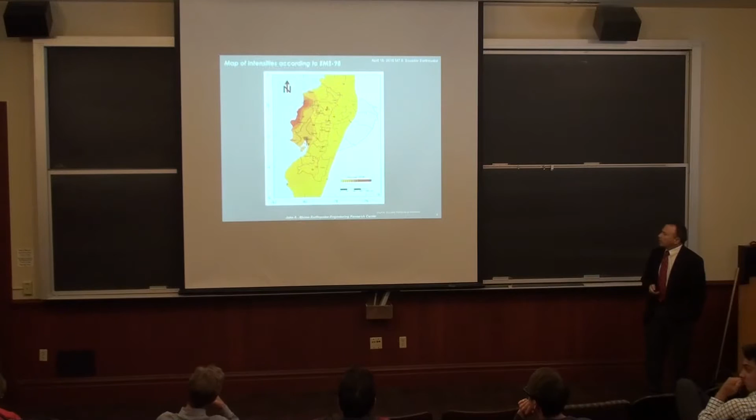And this is the shake map from USGS, and that's the approximate rupture area. So a very large rupture area, about 150 kilometers long. So keep that in mind, because we tend to refer to epicentral distance, and you may be 150 kilometers from the epicenter and still be on top of the rupture. So you may see pretty strong motion still very far from the epicenter. So other kinds of measures of that.

And you may have seen this from the news, the overall effects of the earthquake. The way fatalities were counted there was when a body was pulled out and identified, so I'm sure the real number is much higher than this. And these were injured that checked into a hospital, and the number of displaced residents are those that were sheltered in a public shelter after the earthquake. And in Latin America, it's not like the U.S., so if I were to lose my house, I would not go to the shelter. I would probably go to relatives or friends, so the last resort would be a public shelter. So my estimate would be about 3 times that number of people that lost their house or didn't have a place to go.

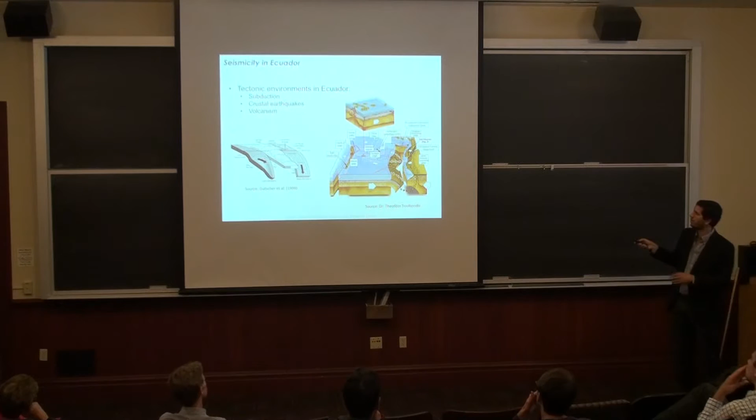So the earthquake that happened now was in the north subduction zone, and the theory is that whenever an earthquake happens in this zone and it propagates upward, it stops right here where the Carnegie Ridge is. So that's pretty much what we have. And also this subduction process has started a transform plate boundary within the continent, but that's not the subduction earthquake that we are there.

So the other big earthquakes before this one were the big 1906 earthquake that ruptured approximately 500 kilometers along the coast, and then 3 earthquakes in '42, '58, and '79 that together, at least that's what they say in the literature, ruptured the same length as the '06. And then came a small 1998 Bahia, which had a lot of damage in Bahia, and now this earthquake, which was here.

So I just told you that the '42, '58, and '79 covered the 1906. That's what was believed before 2014. But then this author says a potential for a magnitude 7.5 event in the next decades needs to be considered there, as well as a potential tsunami. And this is what happened in the earthquake.

So the hazard analysis that we run in Ecuador is based mainly on the subduction zone, and also crustal faults in the continental crust. And the PGA, for example, for the 475-year return period, is 0.71g in Manta, which is a city close by that suffered a lot of damage in the earthquake.

Now, somebody's going to talk about the code, and the code only says 0.5g for the 475-year return period. And the reason why is because they cap it at a maximum of 0.5. So whenever they get something greater than 0.5 for the 10% in 50 years motion, they will just cap it there for economic reasons. And the other thing is this sort of hazard analysis gives you this mean curve, and there's a lot of variability around it.

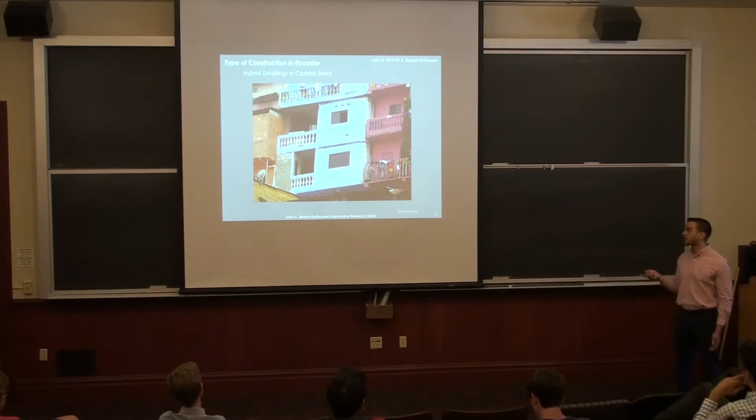This is the type of dwellings that you find on the coast. Some are made out of wood, others are made out of concrete. And these are patrimonial buildings, which are basically where the first settlement took place in every city. These buildings are trying to be preserved, and they are about 100 years old.

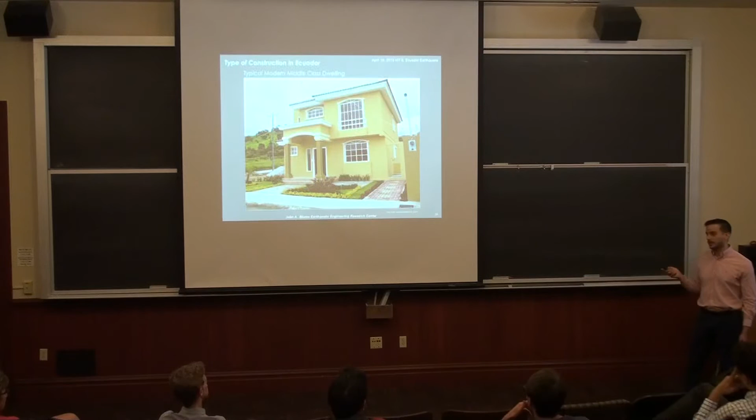This is the type of dwelling, modern houses of middle-class families. They are concrete moment frames designed by a structural engineer. And these are concrete moment frames, but on a bigger scale. For this, we use the ACI code. And we also have steel moment frames, but not as many as concrete moment frames.

So I'm going to talk now a little bit about the recorded ground motions at the 30 stations whose records we were provided. This is courtesy of the Geophysical Institute of Ecuador. They do a great job of collecting. It was a pain to get them to give it to us because they were so busy and they had to go to some of the stations, and we finally have them. They have been processed through the PEER standard procedure, and I think they will probably be shared with PEER and put on the website.

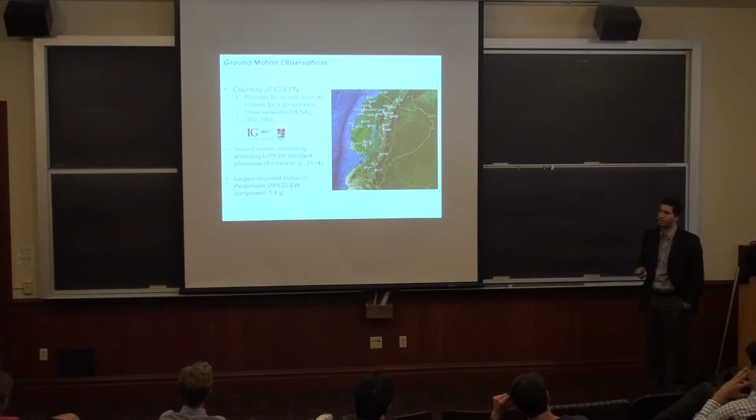The largest recorded motion was in Pedernales, in one of the stations in Pedernales, 1.4 G in the east-west direction. You will see a record. So the first thing I did is I plotted the stations in Google Maps and I classified them as greater than 0.3, below 0.3 and 0.1, 0.1 to 0.05, and below 0.05. And the intensity maps from USGS. And you can start seeing some things.

For example, you see a lot of red to the south of the rupture, and you don't see that at the north. I don't know what's the reason for that, but it's something that is worth looking at. The other thing is Guayaquil City is known for its soft deposits, so site effects are important. And you can see from both the intensity maps as well as the recorded motions that the PGA or the intensity is greater for Guayaquil City in green, that is on a soft site, than the blue that is on a rock site.

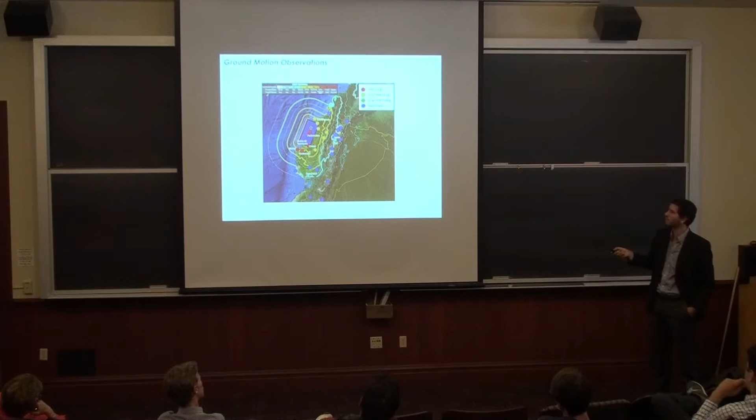Now you can see 8 motions that I selected for plotting this. So the first one is Pedernales, the 1.4 G. Actually, it's this spike here. You can mix it with the Chone one, but it's over here. And then Pedernales, the other station, 1.06. Then I selected this AB21 station because it was a similar distance to Chone. The only difference is it's located at the north, and it was 0.2 versus 0.37, almost double. So we don't know why that's happening.

The other thing is Manta is 0.5, even though it's further away. And when we went to the station, it was on a cliff, so we may think that it's topographic effects there. And Portoviejo is 0.38. The important thing about these three is that you can see the frequency content. It's much higher frequency here in Manta, Portoviejo and Chone. So we thought maybe it's site effects, some type of soil effect that's going on there. And then the other one was Guayaquil as well. Here is a rock station, 1,000 meters per second shear wave velocity, and this is the record. And this is 5 times the PGA of this one here. It's 0.1 G, and it's in soft soil.

The other thing here is Pedernales, the time history. You can see it's a relatively short motion for a subduction earthquake because the distance is small. In Guayaquil you have like 1 minute of shaking or more than 1 minute. Here the strong shaking is 40 seconds. And then you can see the spectral values are much higher than the design value.

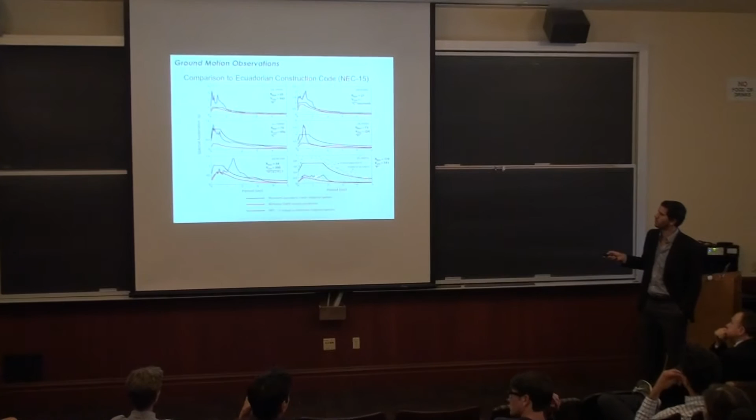Now I'm going to talk about the geotechnical aspects of the presentation. First, liquefaction that we saw in Manta. This is a sample of 90 centimeters. Nothing happened to a bridge, the bridge was on piles. Then I measured what the ground settled relative to the bridge, because that's the settlement of the ground, and that's of interest, for example, for buildings. It was like 20 centimeters of settlement.

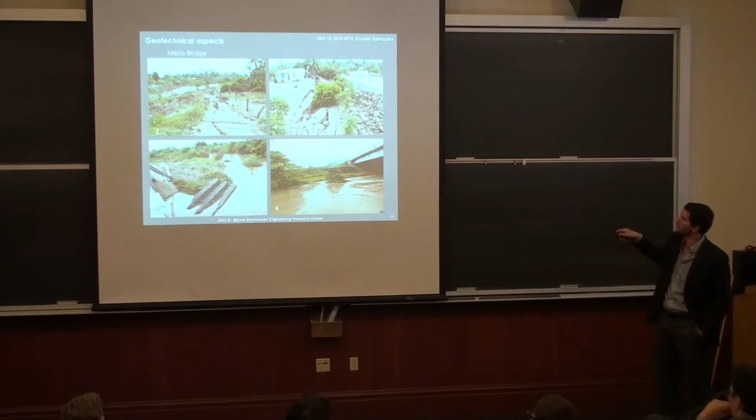Then this is the Mejia bridge. I'm going to show you 4 pictures of the abutments. The bridge is fine, and I'm sure some of you are going to talk about it, but the abutments did fail. This is my foot for scale, it measures like 1.8 meters, so it's a lot of displacement. This river displaced 2 meters laterally, so it basically changed the channel of flow. This was the other abutment, the guardrail failed, and the other abutment didn't, nothing happened. So it was these 3 abutments that failed from lateral spread and liquefaction.

Then this is an interesting case in the sector of Tarqui. Manta had a lot of damage. This is before the earthquake, you can see it better here, it's probably 3-4 centimeters above this house. And this is what happened in the earthquake. So what's going on here, and we saw a lot of this also in New Zealand, the foundation was, this house was 2 stories and then they added 1. The foundation was probably 2 spread footings with tie beams, but the beams there are not reinforced, it's flat construction. But then it was a bearing capacity failure.

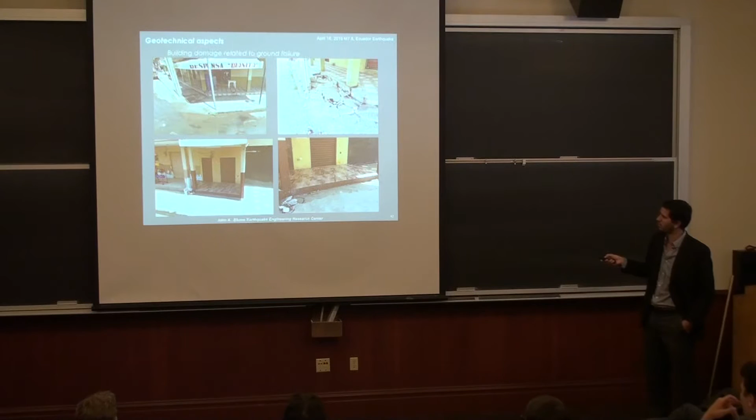The house didn't have much damage in the elements, but look at this, the soil within the house. Then this is the same thing, this is before the earthquake, and you can see how the sidewalks go up, like a bearing capacity type of failure, and the building punches into the ground. And here it's more clear. This is a sidewalk sloping this way, and now look at this after the earthquake. So the whole house punched into the ground.

Now this is a slope stability case. I'm on the bridge right now, and I'm just looking at the slope before the earthquake here in Google Maps. This slope goes the same way under the bridge, and there are 4 piles that we will see next that are within that slope. So this is the slope failure. Here they sold cars, so some cars almost went down, and then this is the failure of the slope itself. Here you can see this white is where all this was covered with soil, and the soil moved laterally towards the river.

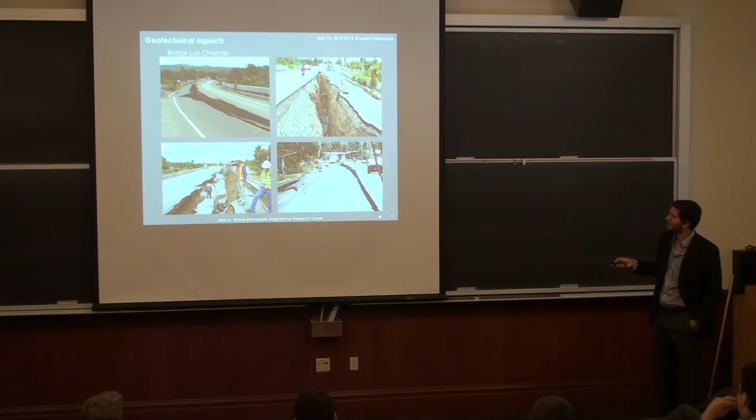This is an interesting case, the abutment of the bridge Las Chacras. It's not well transited, it's a small town near there. This is me, and this is probably 0.5 meter, my leg, and this is probably 5 meters of the crack being there. This line here goes with this line, and these were all together, this all laterally spread that way, and punched into the ground too, because this was like 2 meters of sediment. And this crack ran along the embankment, like 800 meters on one side, and like 900 meters on the other.

We took some shear wave measurements to see what material is there, and we know there are some clay deposits about 7 meters deep, and the embankment was 4 or 5 meters deep.

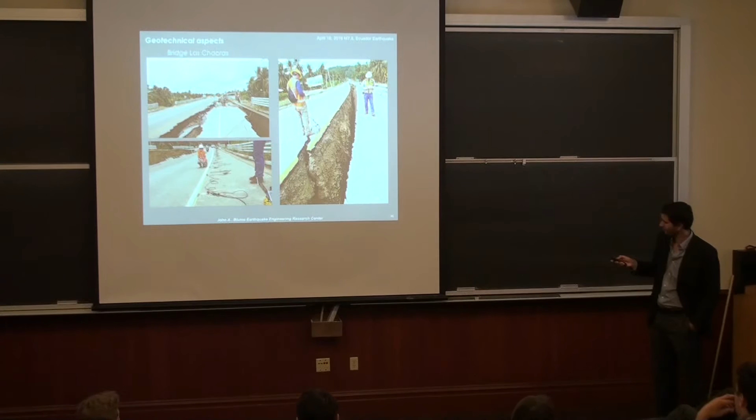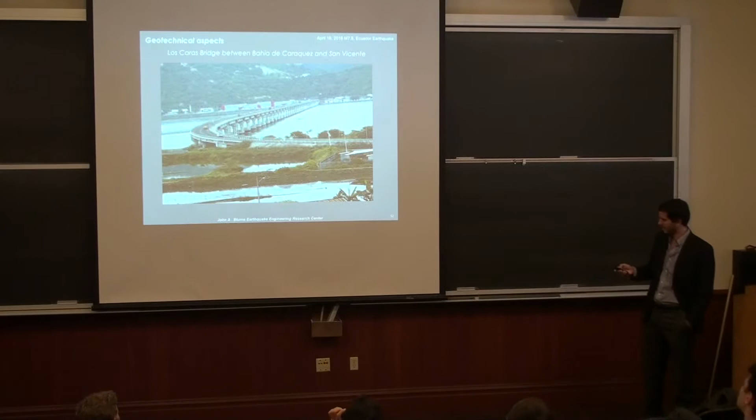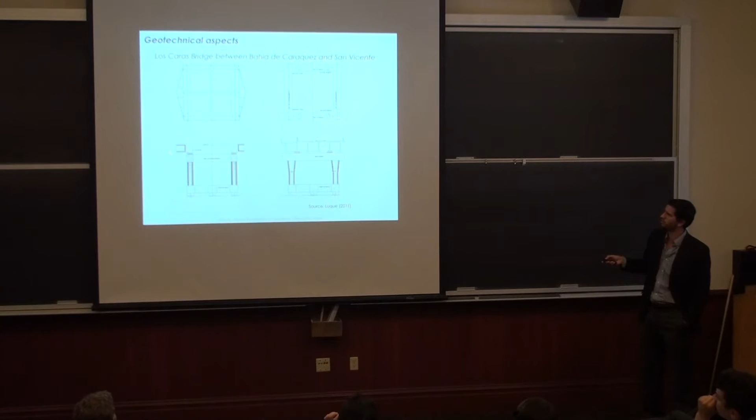Los Caras Bridge is important because it was a success in that it was designed to be operational after a big earthquake, and it was. But I was surprised because I was involved in the project. I did my undergrad thesis on this bridge, and I also was involved as a consultant for the pile contractors. I expected a lot of liquefaction. They're going to talk about the structure, but it's mainly 9 or 8 piles, and then this kind of weird substructure with 4 columns, and they have seismic isolators here. They're going to talk about that.

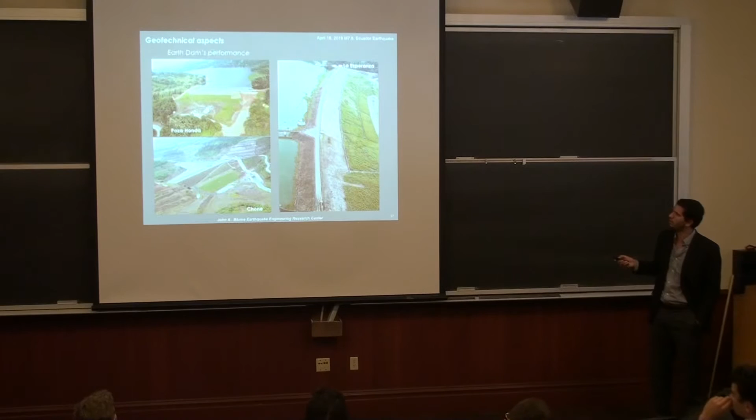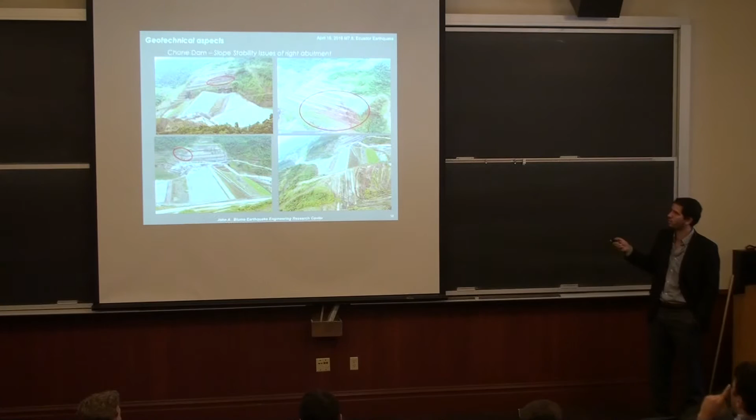Then there's the dams. I went to visit 3 dams by helicopter, and two of these had nothing. This one here had a little bit of slope failure in the right abutment. Here you can see this one is the same, and this one here is also the same, but it's minor compared to the shaking. Fortunately it wasn't worse here, because I've heard that there was some liquefaction there, some material that liquefied.

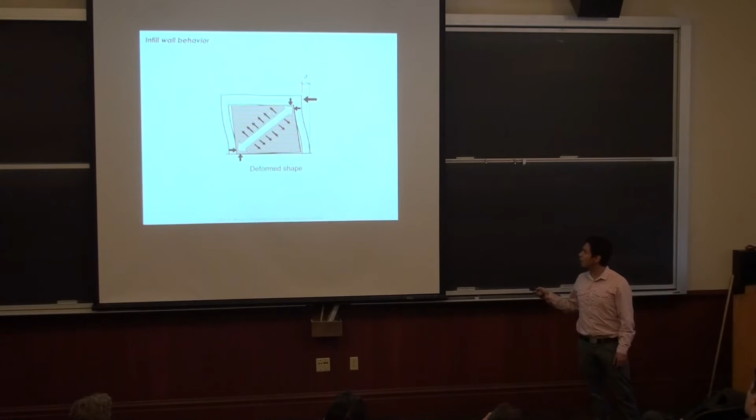That's going to lead to this crack over here. But since earthquakes are cyclic, the same thing is going to happen to the other side. And if that is combined with certain movement of the infill in the other direction, we can lose part of the infill. That's going to be an out-of-plane failure.

And this is what happened in reality. So our cartoon became real. And this happened over and over, even though this doesn't have the beam over here. It had this U kind of failure in the infill.

This case was a small hotel. Actually, a kid was rescued from here. He didn't want to go to the beach with his parents, but happily he was alive afterwards.

And the thing is that if we observe the details of this building, you can see this laundry machine over here that is carrying some extra load. Maybe we think that might have saved the life of the child, and actually these kind of things can save your life.

Another interesting example was this school, the Atahualpa school in Pedernales. It suffered some damage. We see here a back view of the school. If we look closely, well the picture isn't that great, but we have some short column behavior over here. Let's look closely to it.

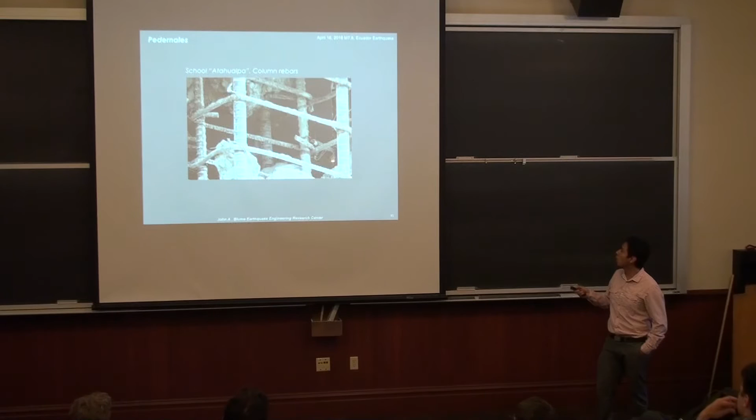This is even good detailing. Rebar number 3, each 4 inches, but it still had this short column behavior. The hooks here are 135 hooks, that's fairly okay. So this is another view of the same school.

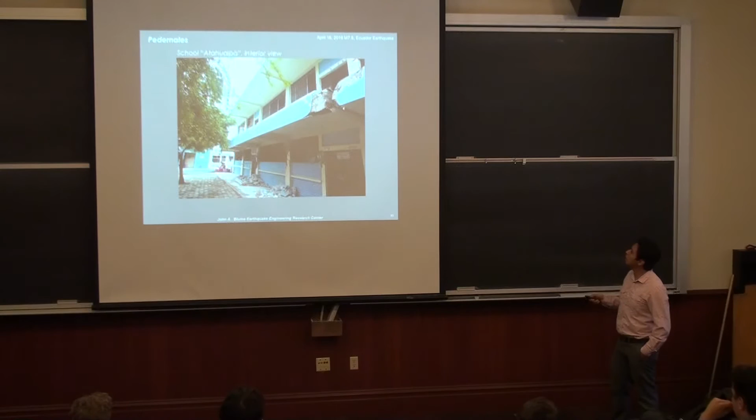If we look at the joints, we see that due to the high shear in this part, there was some concrete spalling over here. And similarly, this is a view from the interior of the school. We can see here the shear failure of this column due to the short column behavior. This is good detailing, nevertheless.

And this image is also important because we see a lot of out-of-plane failure, and though this earthquake happened on a Saturday, if it were to happen during classes, this is very dangerous for kids studying here. So we see the table with a lot of debris here.

And also we see this picture over here, that if we put certain circles over here, we can remember some slides of Professor Miranda, this collapse mechanism. Looking closely, we see a bunch of plastic hinges in the top and bottom of the column. Looking at it, we can see the tension and compression parts. The same thing in some other details of this plastic hinge over here.

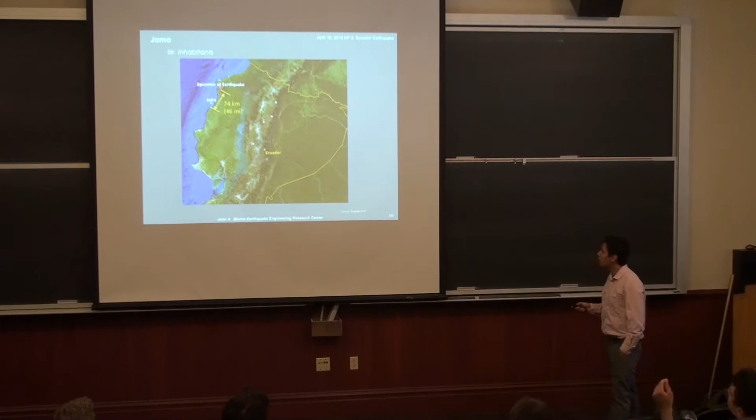And well, that was Pedernales, one of the most damaged cities. And I'm going to cover now Jama, which is a place 46 miles away from the epicenter, 6K inhabitants here. This is a view of one of the schools.

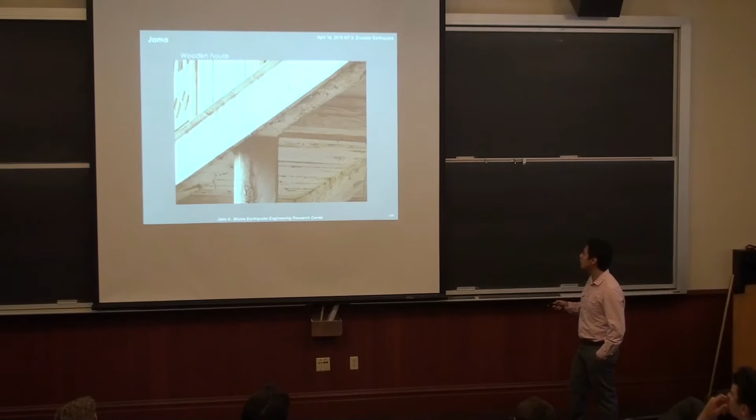And surprisingly, next to this school there was this precarious house over here. It actually has certain damage in the back, but other than that, it's fairly intact here. So it's pretty surprising to see, given the large PGAs, that it made it through the earthquake. We can see some of the connections, and we can see that there is no nailing, so this was actually very surprising. And even though this is a light building, it took a lot of acceleration in the bottom.

Same thing, no nailing. Some details of the slab over here, and in the back, the partial collapse of this slab over here. And we saw some interesting details over here of how is the connection. So you can see certain things sticking out of the column, and that's connecting to the beam over here. So we thought that this was maybe the classical way to do it also in Pedernales, and maybe this is responsible for saving a lot of buildings like this.

Now we see this is a very old building, maybe 80 years old or 50 years old building, and it's fairly okay, but it's astonishing to find that the neighbor over here has totally collapsed. It's very impressive what differences you can find in just a few meters away. And with this,

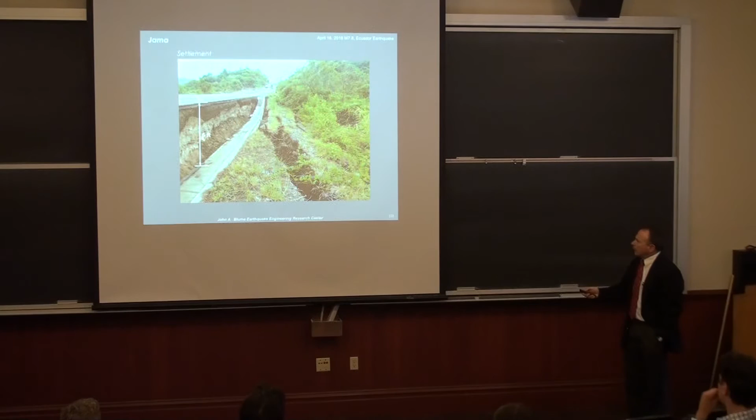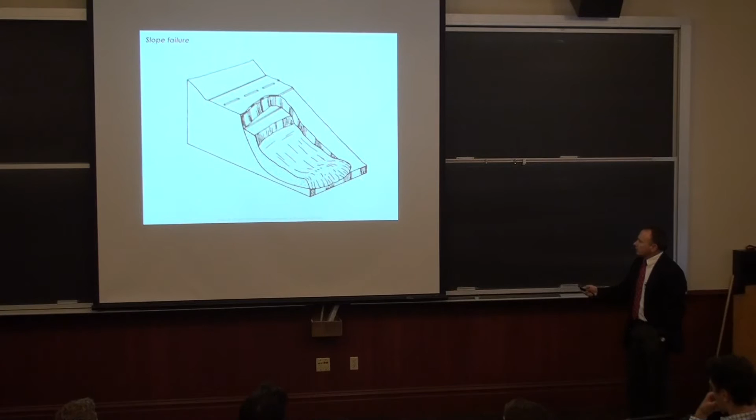So basically, you see this was essentially the drainage that used to be up there, and down there. And really what is happening is this elliptical surface. Those of you who took foundations, you may recall this. That's that displacement that you see here, but there's really a large body of earth that is failing along that elliptical surface. And this is a cross-section that is prepared just to illustrate a little bit how this large displacement is happening.

Usually there's some sort of toe. In this case, it was mainly sort of in the jungle to the right. We took some photos where there's some plants where you can see this. And this was a massive landslide. I mean, sometimes you see landslides after earthquakes. This is as big as it gets. Like half the mountain came down.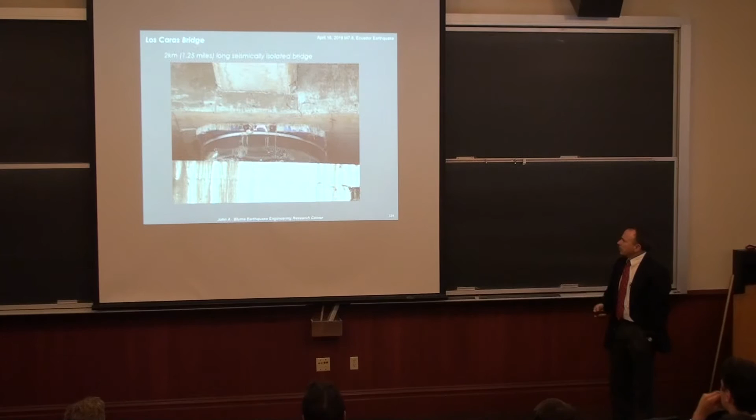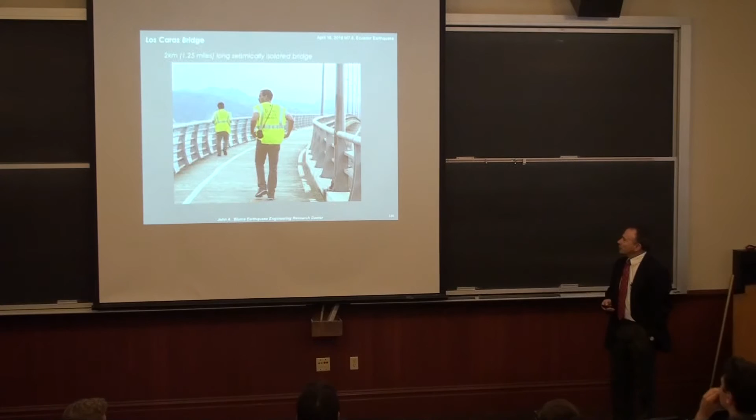I'll show you a detail on the north end where we were able to measure. It's unfortunately not instrumented.

And just interesting: my city is thinking about passing Castro Street, I live in Mountain View, underneath the Caltrain tracks along with Central. So one underpass, they're thinking about spending $120 million. This bridge cost $100 million. So just to give you an idea of what good engineers in Ecuador can do. This bridge here in the U.S. would cost 5 or 6 times as much at least.

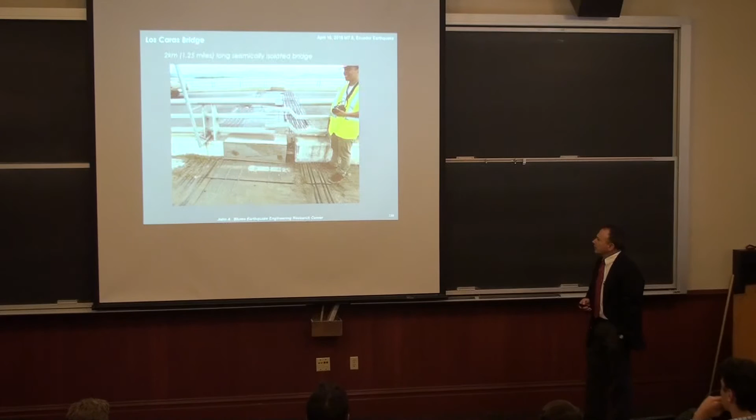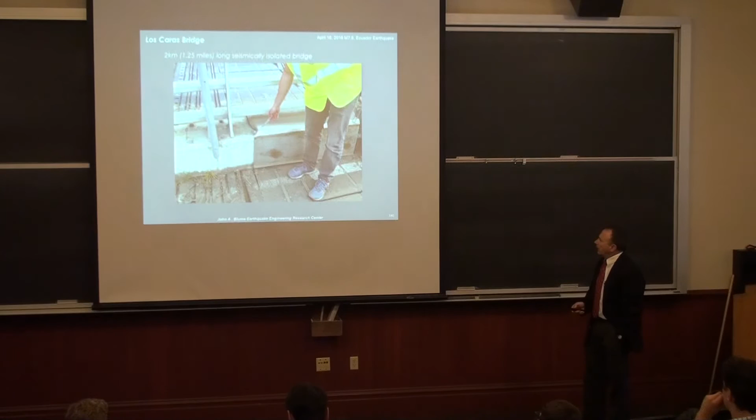And so this is the cover for the joint there. And that's just a close-up view of how that cover was displaced, 20 centimeters. And then it was displaced and buckled there, so we just documented some of that. And that's sort of a record. And the other thing, we put our cameras inside of that and we were able to document the scratching of the cover against these guys.

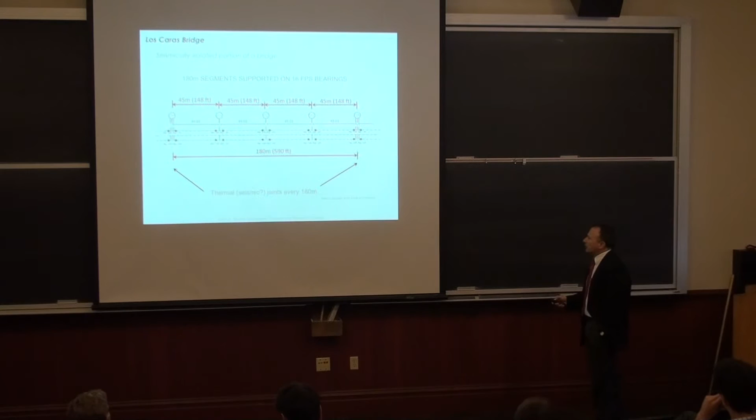And so the bridge is 2 kilometers long, but has this every 4 segments. These are continuous, and then there's some rather small joints there that I have no idea what was the thinking. I think they were primarily aimed at thermal. They're rather small for seismic joints, 4 inches, as I'll show you. And so I'll show you some details of those examples of sort of thermal seismic joints.

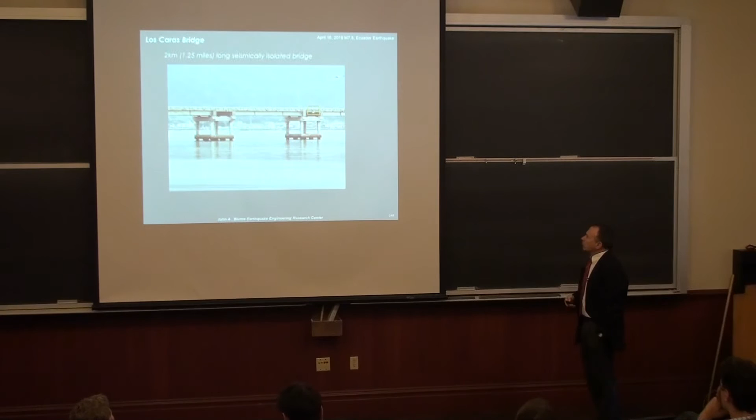But this is sort of the lesson. Sometimes we as engineers put together mathematical models and we have some sort of idea how the structure will behave. Imagine the engineer thinking of a uniform input on each one of these supports, but in reality you can have different motions and they're not necessarily going to move the same. Schematically they may look the same, but they may end up moving differently. And that's what happened. We documented a lot of pounding on these locations.

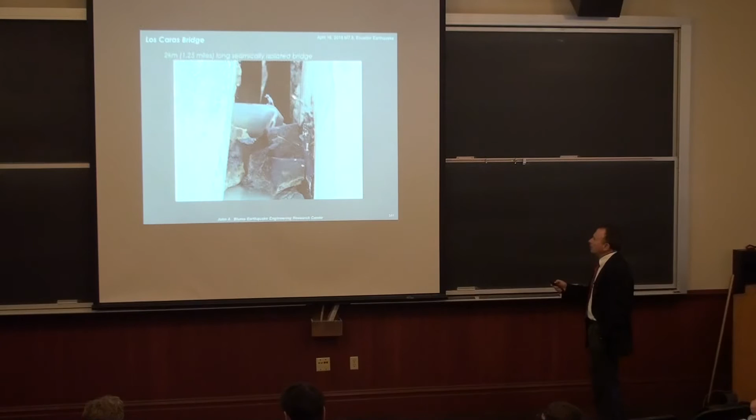And the other thing was kind of interesting, with a lot of thought that goes into doing a seismically isolated bridge and a lot of cost buying these things. Well, the message didn't go to the electricians. So the illumination, which is very nice in the evening on the bridge, they had this PVC piping through the seismic joints. Of course, the earthquake took care of that. But that allows us to also measure some of the relative displacement that took place there. So in this case, it failed in tension, and then there was some pounding there, so we pulled out our crack meters and we were able to measure 4.5 centimeters of relative displacement there.

The other thing we observed there, some of the seals of the isolators failed. And these are pretty much how they're done everywhere in the world, but now we know how they work. So there's a small lesson there, probably the company that manufactures those needs to think about a better way of doing that. If you think about it, there's a lot of these structures that have this kind of hardware, but very few that have gone through a big earthquake. So it's very important to understand and document what happens. We documented a small residual displacement, as you see there. This is just looking down the bridge.

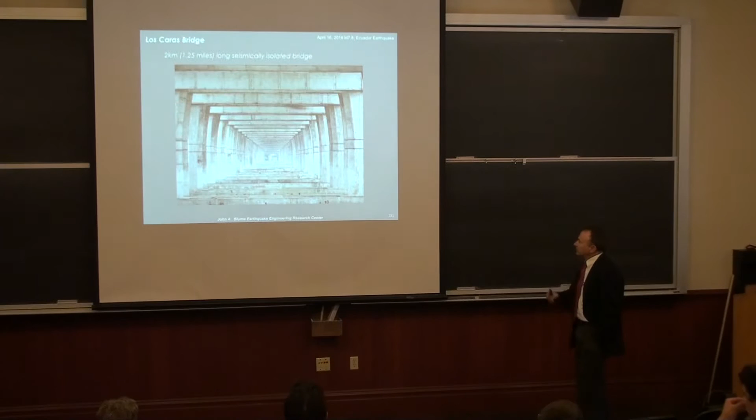And the other thing that I didn't quite understand: I always tell the students in class, you have a system in series, it's as strong as your weakest link. So why would I do a portion of the bridge that is fixed base if 90% of the span is isolated? But that's what happened. The south end is fixed base, and I would have isolated the whole thing.

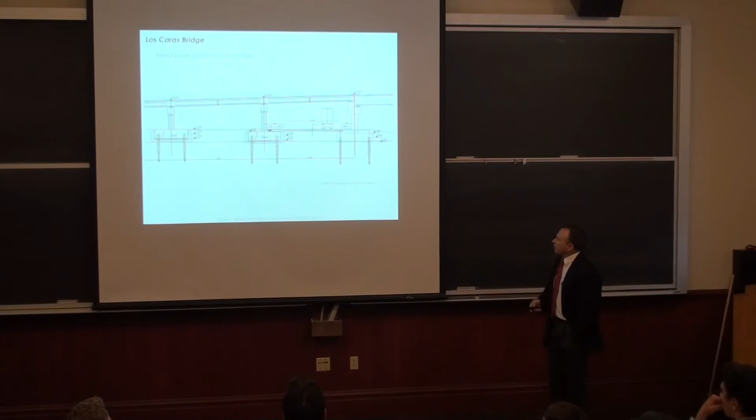These are some details of that. Sort of like 101 type of bridges with beams that get supported on the supports, and fortunately nothing happened. But there were some cracks there that were not terribly critical for the structure. But if it falls off, I mean, in Chile, we took 50 photos of those things on the ground. Unfortunately, no one's ever seen it.

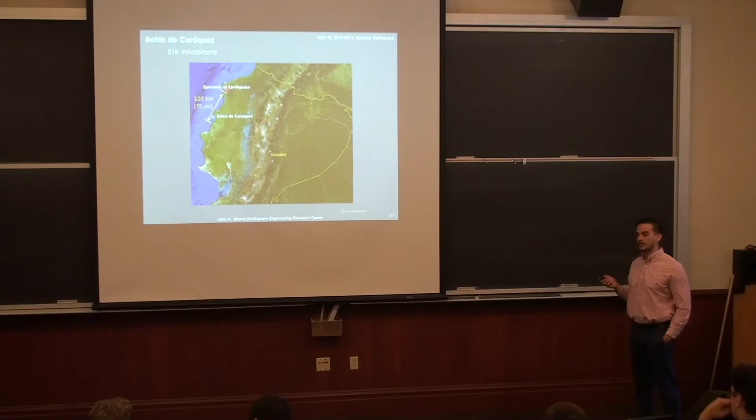Okay, the next city we're going to talk about is Bahia de Caráquez. This was the city that had the last major earthquake in Ecuador, a 7.2 earthquake in the year 1998. There was not so much damage because the earthquake was very deep. It was about 70 kilometers deep. The city is about 120 kilometers away.

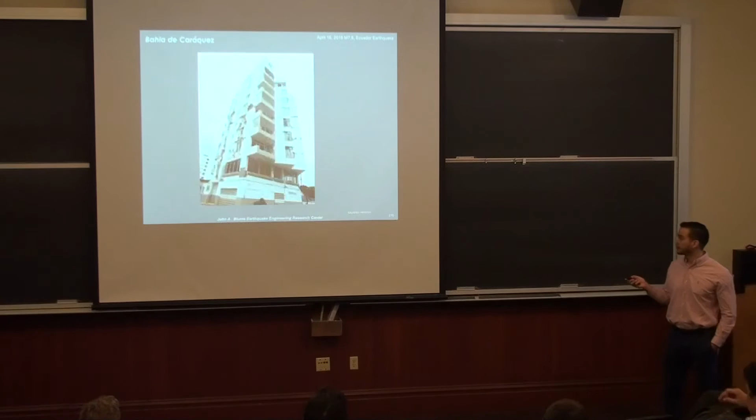This is another building. If we take a closer view, we'll see glass windows broken, non-structural damage. And again, another building, we see glass windows broken, a lot of glazing again broken. This is another building in which, if we look from the first story, we see what is called punching shear failure, which is a very bad failure in a building.

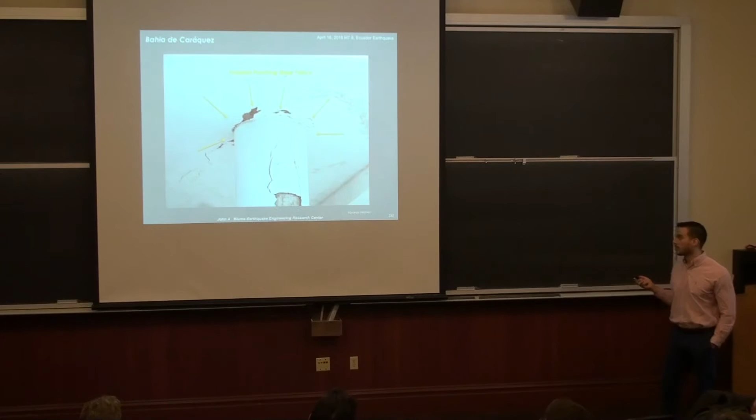This next one here had again a lot of non-structural damage, and if we look from below, another building had the same punching shear failure, which as I told you is very bad for a structure. And also from below you see all the broken glass that has fallen off the building.

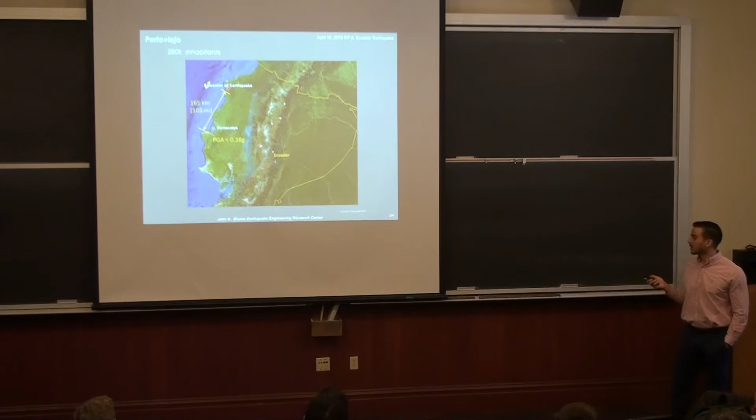The next city is Portoviejo. This city is the capital of the province of Manabí. It has the biggest population of the province, which is about 280,000 inhabitants. It's located 165 kilometers away from the epicenter and had a PGA of 0.38 g. This is the city where I was born, actually.

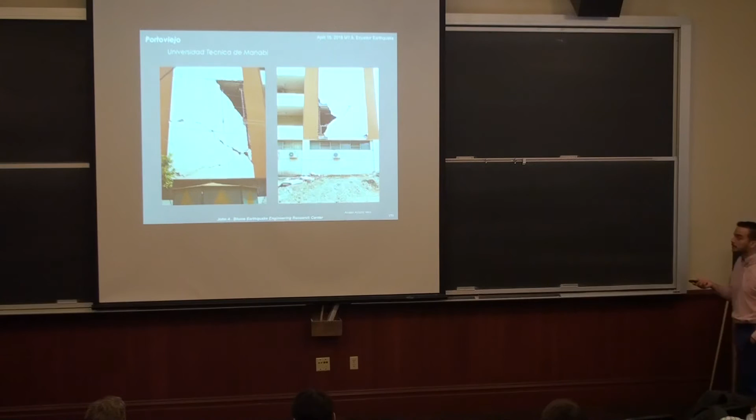Then here you will see a column that had shear failure. If we take a closer view, we see that the detailing is well done and it complies with the code. It has this diamond configuration. This is, like Luis explained before, out-of-plane failure: it loses capacity on one side, then goes to the other side and just collapses. Here you can see how far the walls came down, and if somebody had been walking around there, it would have killed them.

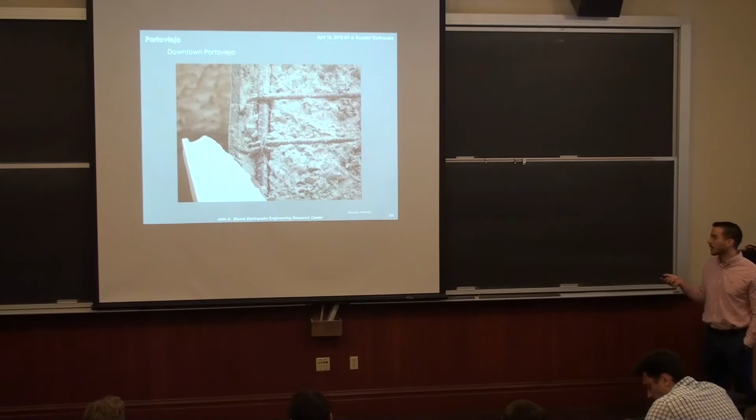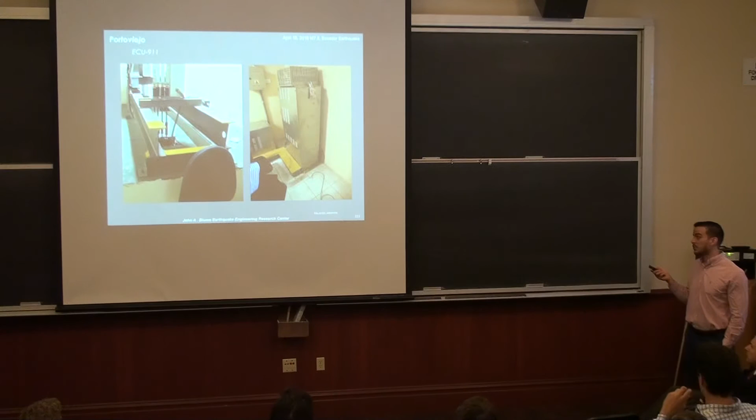We went to the facilities of ECU 911, which is like the 911 you have here in the US. And we see some damage here. This damage is not because of a structural thing. Apparently, the constructor or the architect didn't know that there was a seismic joint between the buildings, so that's why it caused that. We also went inside the building and saw the machine rooms for the elevators. Sometimes you expect to see damage here, but we didn't see any, because it was well anchored to the floor. And inside the elevators, the counterweight got derailed. It is very common that elevators derail after an earthquake like this.

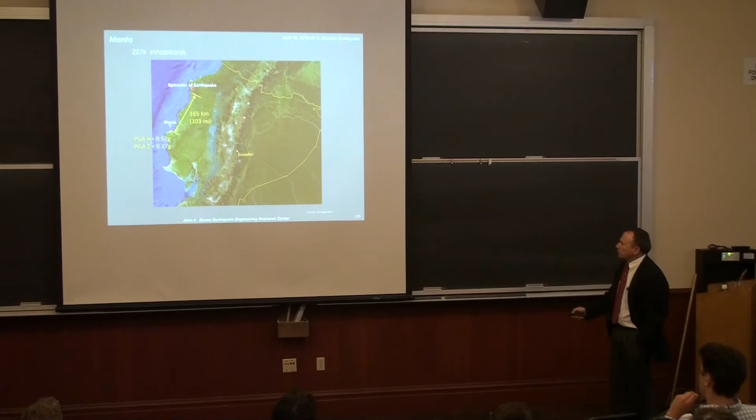So now, moving along, I'm going to describe the city of Manta, which is the largest that we visited, other than the largest city, Guayaquil. The capital is Quito, which is here. This is a large city, relatively close to the epicenter. It's about half a g. And one of the most important sites we visited was the port of Manta.

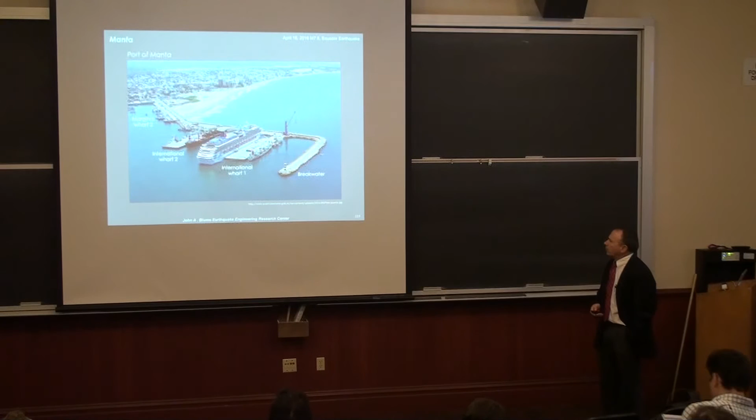Ecuador has 3 large ports. It's one of the important ones in terms of imports of cars and many other goods, and kinds of ships that are not able to go to Guayaquil get here. And there are a lot of exports of shrimp, fish, tuna; Ecuador is a big producer of tuna. It has 3 wharfs, a breakwater over there, and the marginal wharf. I'll show you a little bit of what happened on each one of these structures. Just a few photos I downloaded from the internet, so you get an idea of the size of this.

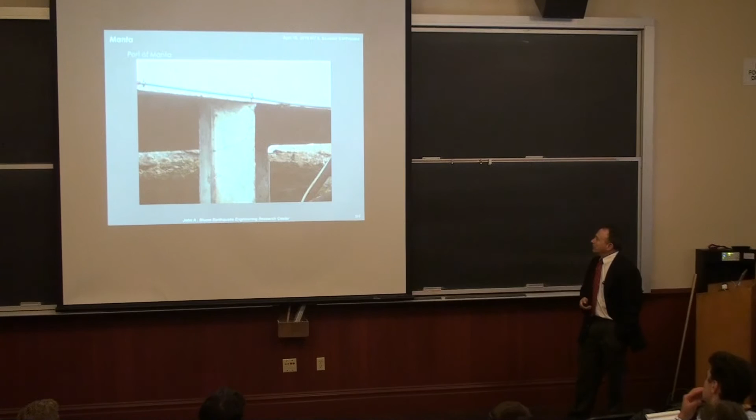And some of these things, don't ask me why, but they got jacketed up to this height, and they left a little guy up there. And lots of plastic hinges and shear failures. Just so you get a sense of the size of these wharfs. And this is one of the international ones. These are massive. It's 900 piles. So we were just there a few hours. But imagine that we were tasked to inspect each one of the 4 faces of the 900 piles. Somebody's doing it as we speak.

The other thing that is sort of interesting is the way we design these things is the typical structural engineering approach, right? We simplify the problem and we say, okay, these guys take the vertical load and the battered piles will take the lateral load. And that was the kind of thinking that went on with these American engineers. They retrofit the battered piles, and in particular the ones on this side that they figured needed to be retrofitted. And here comes the earthquake that proves it's wrong. It doesn't work like that. Vertical gets trashed.

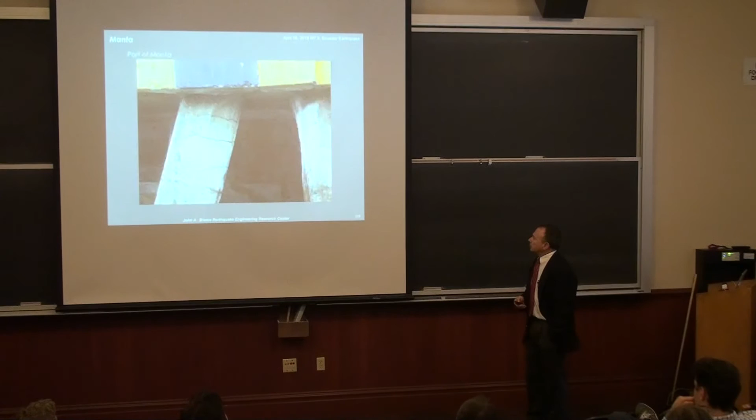And battered piles, again, this is a standard way of doing wharfs all over the world. You see there's lots of problems. So hopefully this is not pulling up and it's good. But it didn't look too different after one earthquake. I don't specialize in ports, but just in my life I've seen those kind of failures 5 or 6 times. We took a boat tour under these guys, and there you see the central portion of the wharfs. They're the vertical ones, and then the battered ones are on the rim, the inclined piles.

So it's sort of like the earthquake comes and asks you which ones should I impose lateral deformations on and which ones not. And here comes the earthquake and crashes everything. Actually the vertical capacity of the wharf was increased. That was one of the main tasks this firm was tasked to do. They added some vertical piles, and in those cases they connected them with these massive corbels. This is about 60 inches by 40 inches, so plenty of capacity. It comes here quick and teaches us a lesson.

This is the marginal wharf. It's an open wharf, and I'll show you from the top. Looks kind of suspicious, as you can see there. I'll show you a close-up view. So they didn't design it that way. And this was the wharf, and then the earth structure next to it settled. Big step there. Documenting 48 centimeters settlement. And then, interestingly, there were portions there. You see the vertical piles taking the gravity, the battered piles supposedly taking the seismic. Pretty good shape.

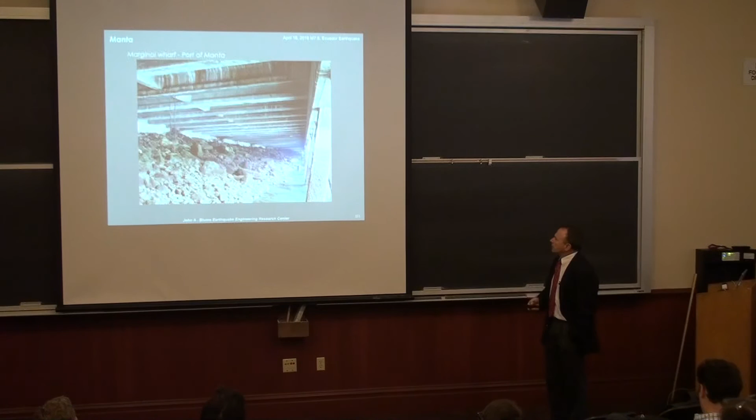But then in certain portions, this is 800 meters long. This is sort of like a standard type of precast elements for the superstructure. And then you start zooming in and start looking at something suspicious. And that pile used to be connected to that. But in some cases, it's more than 1 meter away. And precast piles, there you see the half-inch prestressing strands, 270 ksi strands, mild steel, stirrups, and I just took several photos of each one. Many gigabytes of photos.

The other thing that's interesting here is you say, where is the axial load going? What is the axial load that each one of these piles is taking? And then this one is broken, that one is broken, the next one is broken. Like, where is the axial load going? Right. And there you see how generous the beam is. It's just deflecting a whole bunch, but it's able to distribute the load. We're able to walk. So for those in my earthquake resistant design class, this is something that I'll ask you to find. So think about this.

So short column, right? You build some stairs on one of these piles. The earthquake recognizes that was not in your computer model. So the question is, did this failure happen when the earthquake was going to the left or going to the right? Just think about it. You still have another week.

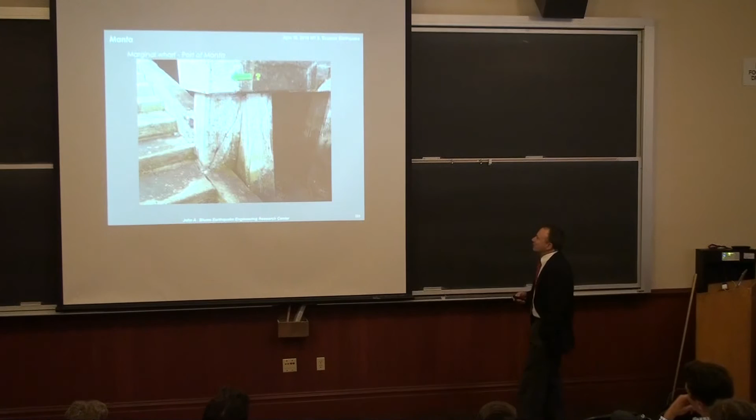Okay, so this is just walking along. Lots of deformation, lateral spreading, liquefaction. There's Professor Rojas standing there. And then this is the breakwater, a lot of lateral spreading again there. And major cracks. This is the international airport. Actually, for some reason, in this earthquake, we managed to beat them here. We were there before, and we were even before the U.S. Army.

And this is what happened to the control tower. And now the U.S. Army actually has a portable station that they brought in, and they're operating the airport from there. There were 2 operators up there, and one of them escaped.

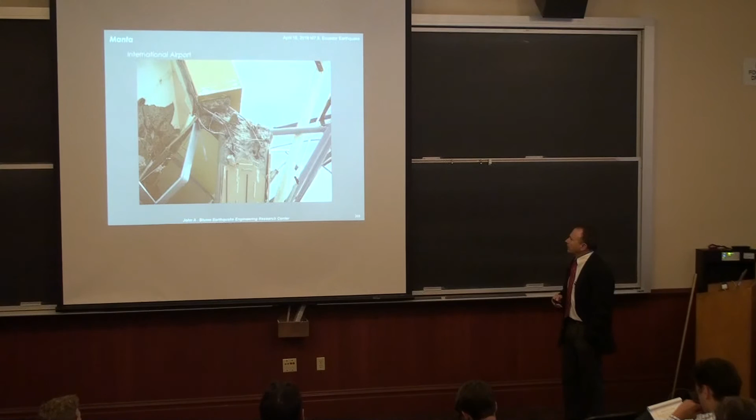And then the main terminal, mainly non-structural ceilings on the perimeter, as we've seen many times. VIP room, if you want to visit it.

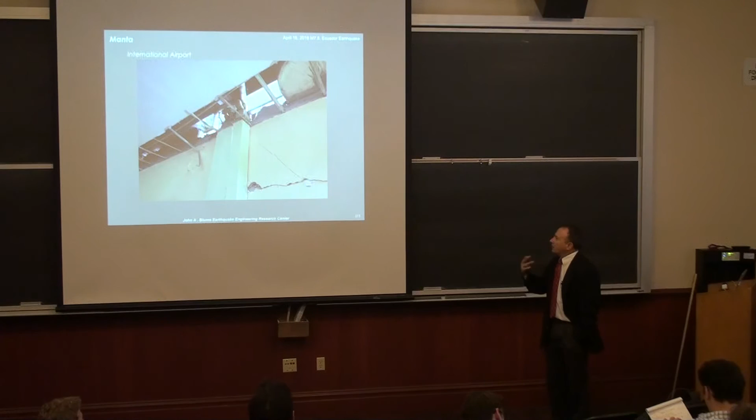This is sometimes called short column, induced short columns. We sometimes think short columns just happen when there's a partial height infill, but sometimes what happens is you crush the infill, and then create an induced short column that happens afterwards. I show you from the outside, and then you get failure and start losing vertical carrying capacity. Again, inside the terminal.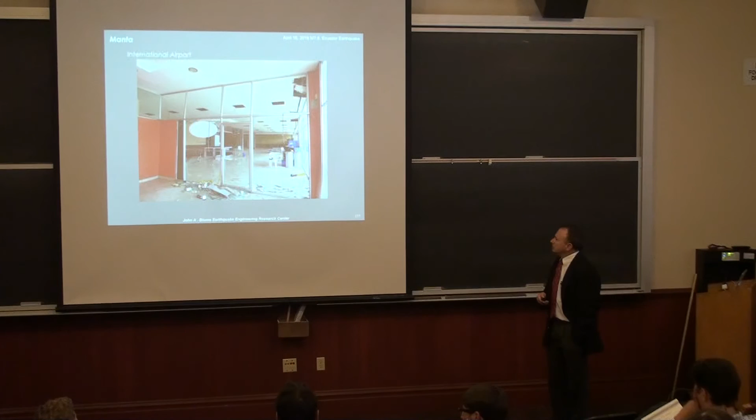I'll go through this quickly, but as I'm showing these photographs, I want you to think about this. Imagine you're a doctor, a patient, or a nurse or staff who was in there, and just imagine what's going through your mind. That was the emergency exit, so people were supposed to go down the stairs, go behind this, and then come out of that stair.

All the infills there, here's one of those. Lots of problems with infills. These were never seen before, something like this. This would literally split the wall.

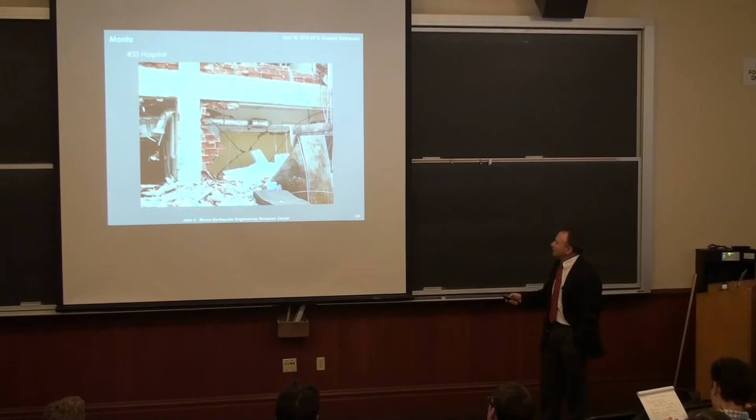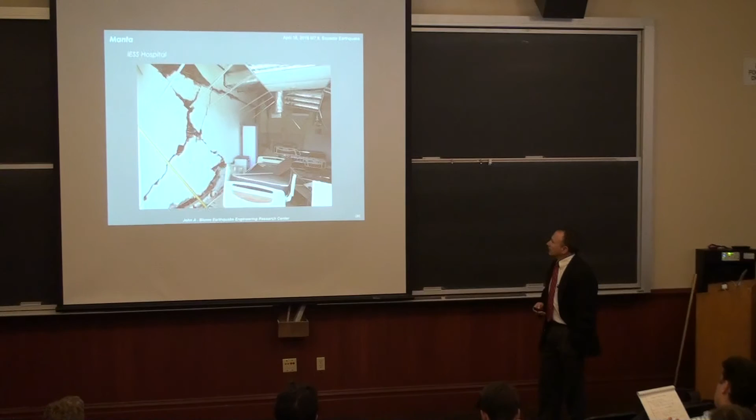That's your corridor, your way to the exit. And then that happens two levels up.

Same hospital. I'm a big fan of models and computer models and estimation of drift and acceleration and these economic variables. These are the stairs.

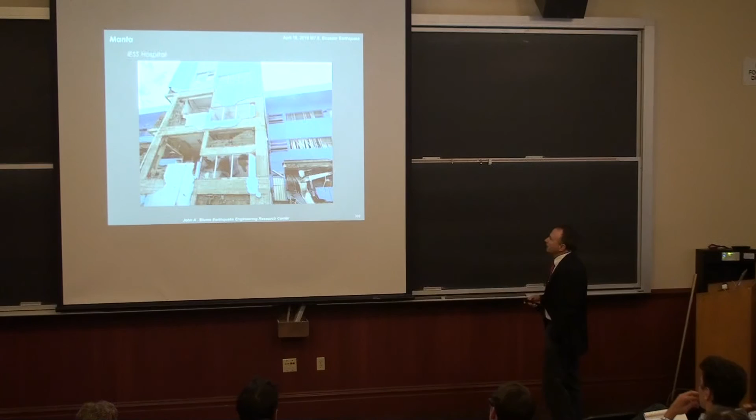I'll show you now what goes along in terms of structural damage. I was looking for structural damage in the structure. I'll show you the most that I can see.

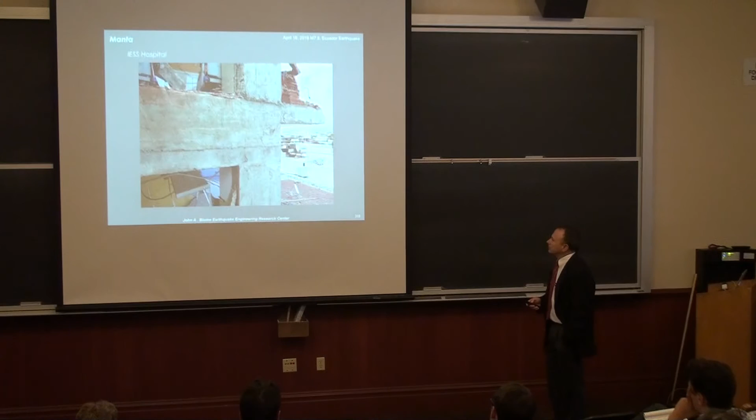This is a university. Since we're on a campus, I'll show you another campus, and just a few details, again a lot of infill. This was the office of the president of the university. And you think about computer models and OpenSees and so on, try to predict what that guy really felt.

Another thing, don't ask me why, but I saw a number of buildings like that with a joint right there. We have here one designed by a very famous architect and engineering firm, on campus. Clark Center has the seismic joint right there, which is fortunately a little bit bigger than this one. Couldn't see much of it that way. That could be in the final too.

This failure happened when it was going to the right or to the left. Next time you go to the movies, go to the box office, think about this photo.

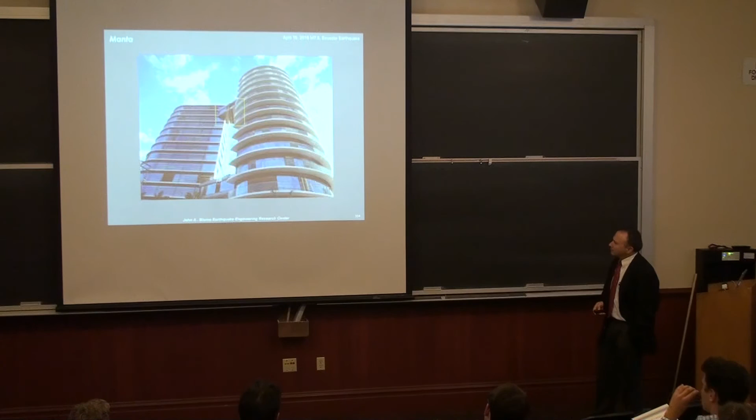This is a really fancy building in downtown Manta. Had a couple of bridges between the two towers, and they had fairly good detailed seismic joints. Zoom in a little more, so they clearly left a gap there, and they had a number of things there in the upper level, a relatively generous gap, obviously not enough as you can see.

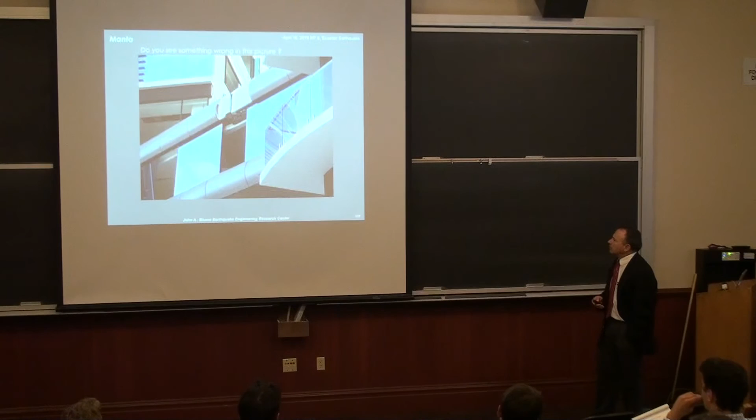But what do you think is wrong with this image? I mean, that's typically what happens. You think of structural engineers, and then somebody else takes care of the non-structural components. And what was the pattern on the glazing there relative to the joint?

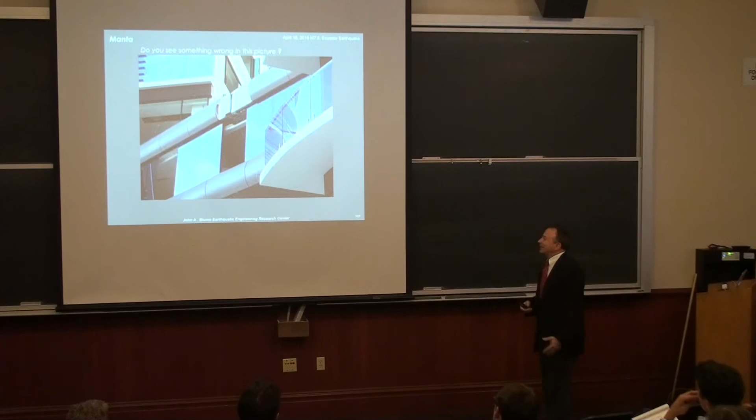Things like this, a ticking bomb waiting to go off, is not enough. Just a few more examples: lots of soft-story collapses in Manta, very tragic.

And then, again, tricky things where you have full infills, but then they fail in compression, and they end up producing shear failures in the columns.

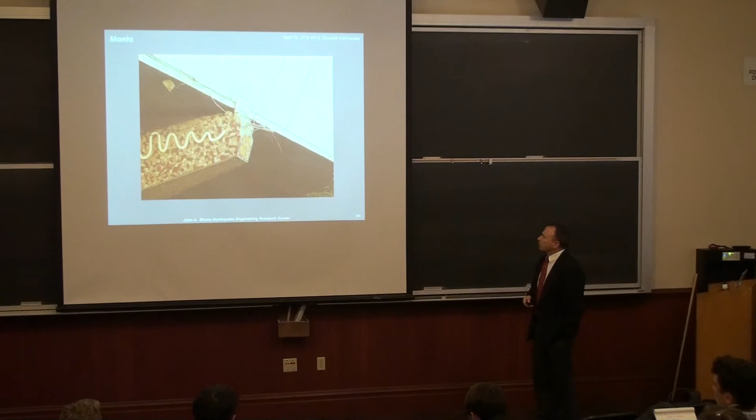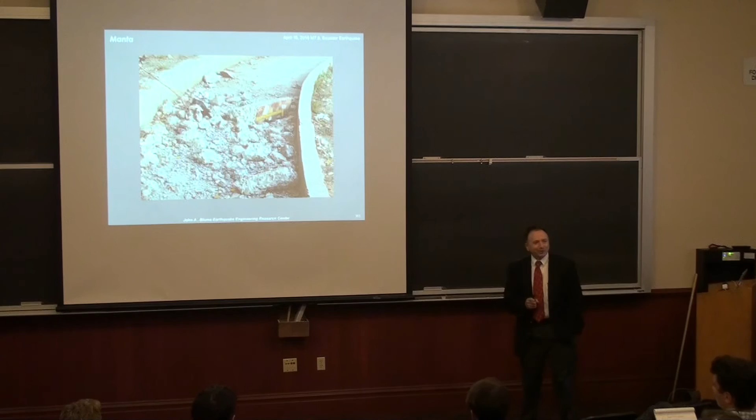A few on bridges, similar failures to the one I showed you in the Caras bridge. Again, maybe not a big deal from a structural perspective—there's a lot of concrete up there. When it falls off, that was the bike path. So that's why I tell the students, where the hell... lots, essentially all of them are like that.

More photographs. And then the puzzling things: there's not been a single earthquake reconnaissance I've done where what you actually see is that earthquakes are very picky. It's like, I'm going to break you, and then skip two more, and then fail this one, skip three, and go to the other one.

These were two hotels, side by side, very similar. You could basically have all the problems that you could think of. But this one, all the glazing is there, essentially no cracks. The one across the street looked like that. And the one next to it looked like that.

Sometimes in these design documents we compute rotation capacities of elements and say, oh, non-ductile reinforced concrete, that only goes to maybe 2 or 3%. Then you look at photos and say, oh yeah, I think that goes to 20%, or maybe 30%.

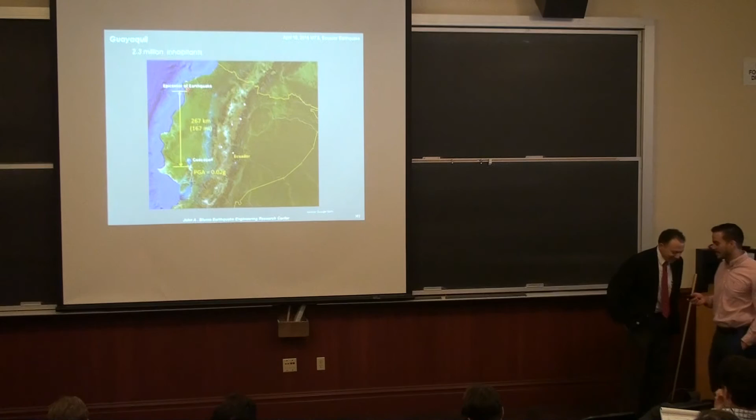So finally, Guayaquil? Largest city—yeah, finally, the last city. This city is the biggest in the country in extension and population. It has 2.3 million inhabitants.

Located 267 kilometers away from the epicenter, and the PGA is very small. But since this city has very soft soil, the ground motion can amplify.

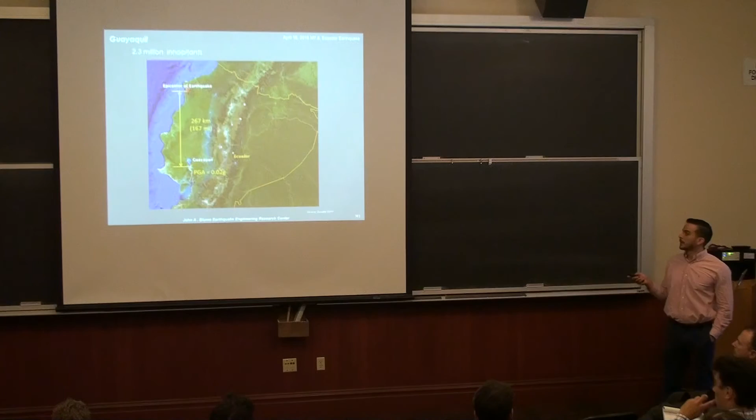I'm showing you here a bridge that connects the northern and southern parts of the city, and this is how it looks after. You can see the pre-stress beam is fine, but if we take a closer view to the piers, that's where the collapse happened. These are the piers next to the ones you just saw, and they failed—they had shear failure.

The reason why they failed is because the design was not well done. This is a bridge—two bridges that are about 0.3 miles away from the one we just saw, and they also had failure, with big cracks along the columns of the piers.

Here's the explanation: the lateral force comes, and there's compression because of that and because of the load of the deck, and it forms a strut which makes a perpendicular field of tension, and after that the cracks form.

We also visited some hospitals in Guayaquil. This was for us the most interesting one. This is Solca, which treats patients with cancer. This is the view of the building.

This building had some structural and non-structural damage, especially structural—a lot of that. Cracks here. This is an emergency exit, structured for emergencies, but this is how it looked after the earthquake. I don't know if they look familiar to you, but they're the same type of emergency doors we have in the US. Hopefully that doesn't happen as well.

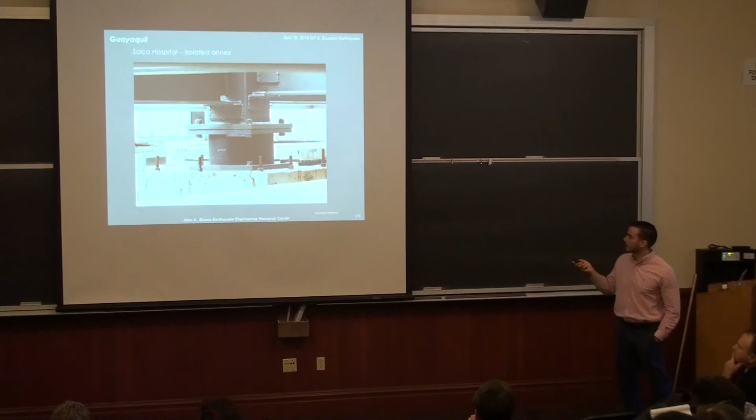Last, we went to one of the most modern parts of the city, called Puerto Santa Ana. This is actually the tallest building in the country, in Guayaquil, and it's located next to a parking structure. From there, we thought there was no damage, but Professor Miranda had a very sophisticated camera and started zooming in, looking all around it, and found some damage. You cannot see it from a distance, but if you go closer, there was pounding between the two buildings.

Imagine that this is not a big earthquake, and they had this damage. Even though it was not very severe, it shouldn't happen, so it has to be foreseen in the design of these buildings.